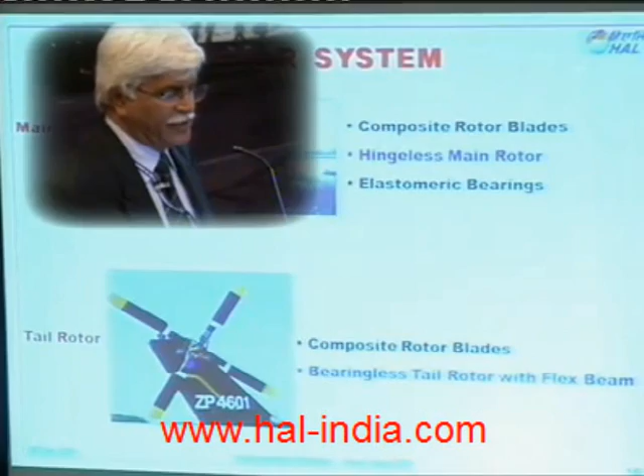The main rotor is composite. It's hingeless. It's the most agile helicopter in the world today because of this rotor system that we have on ALH and LCH. The tail rotor is also 4-bladed, and it's also composite, and it's a bearingless tail rotor. It doesn't have any of the mechanical bearings, etc., that are common in rotor systems, and this actually improves the reliability of the rotor.

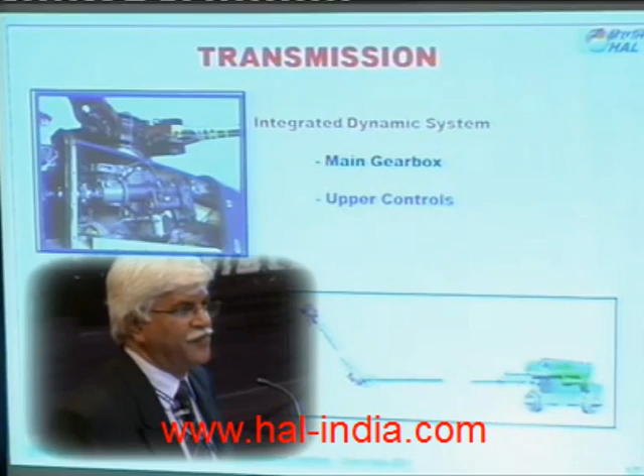The transmission is called an integrated dynamic system. It not only houses the gearbox, but it also houses the upper controls inside that. It is considered to provide some safety in terms of fire when you're under fire. And at the bottom you can see the intermediate gearbox and the tail gearbox. They are the same as on ALH.

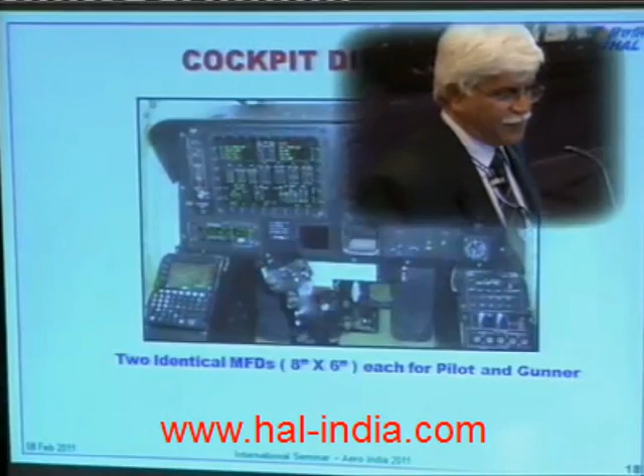This is what the cockpit is going to look like. It has MFDs, it has standby instruments, and whatever. It's very modern, it's state of the art. The airframe, this is what the airframe is. This is the kind of airframe which you would put in the breakaway fuselage test. You would load this airframe and you will check for its structural integrity.

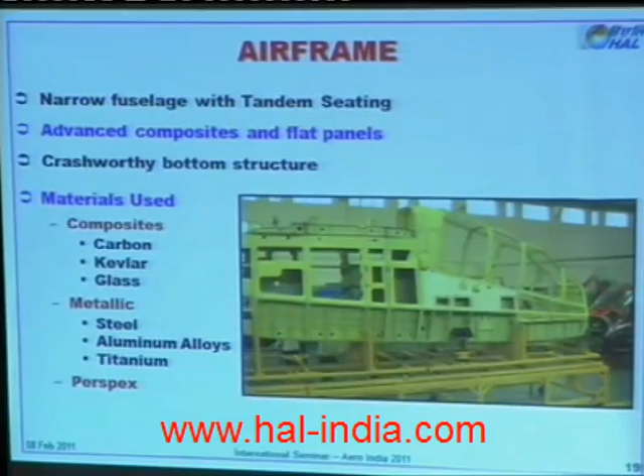The LCH, like the ALH, is very composite intensive. We use carbon, Kevlar, and glass. We also use metallic, especially for the frames. And these panels which we are using on LCH, unlike ALH, are actually metallic composite sandwich panels. The glass is Perspex.

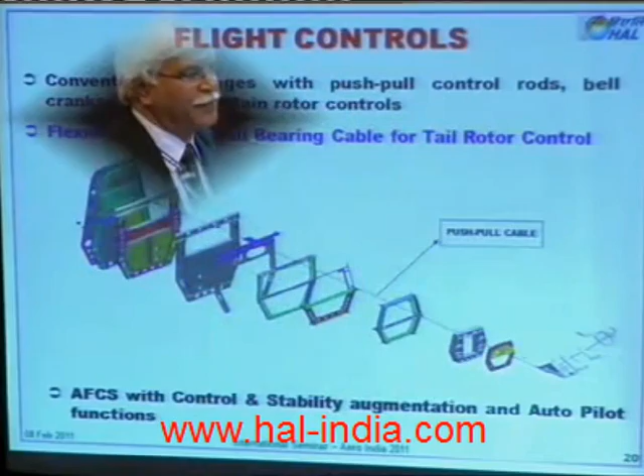In the design, we start normally with a feasibility study. We come up with some shape, we put it into the wind tunnel, and we do a lot of testing at the wind tunnel to ensure that the drag is minimum. We carry out weight, CG, etc., because unlike aircraft, helicopters have a weight problem, and your payloads can be greatly affected if your weight is high.

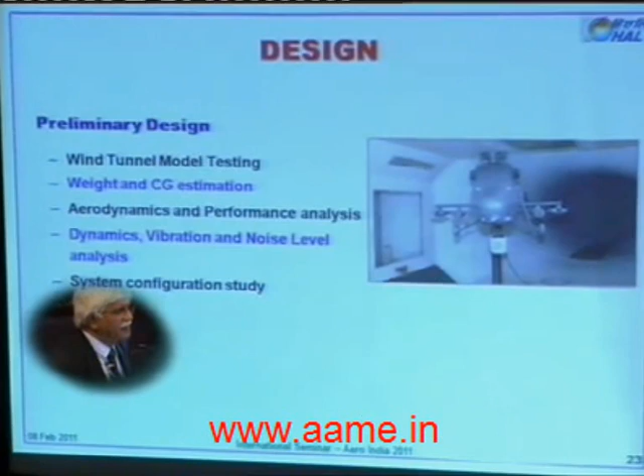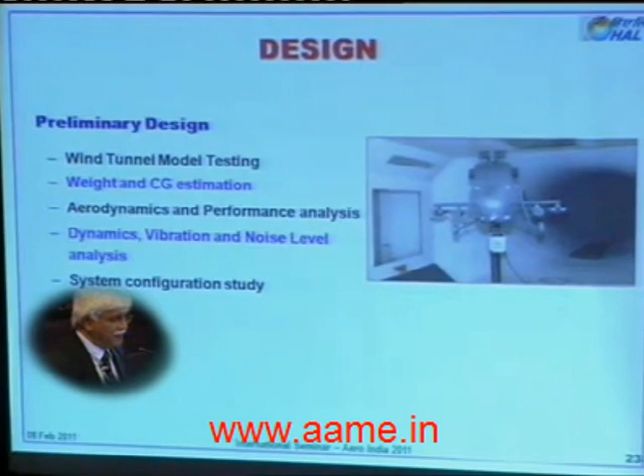We did have this problem on the LCH when we started, and we have had to reduce from the initial estimates something like 350 kgs, which we have done fairly successfully. Aerodynamic analysis, vibration, we actually use finite element models to study the stress as well as the dynamics.

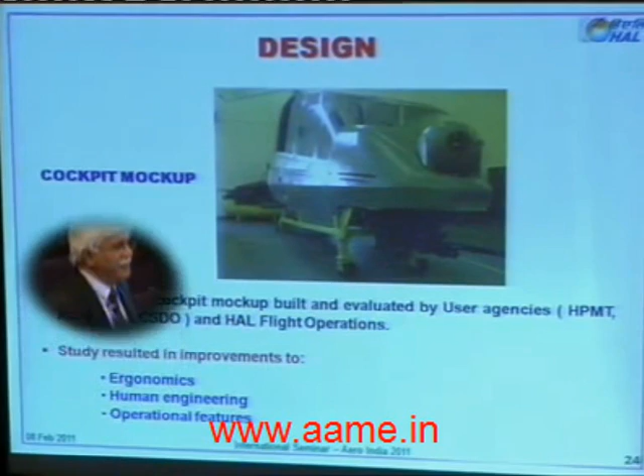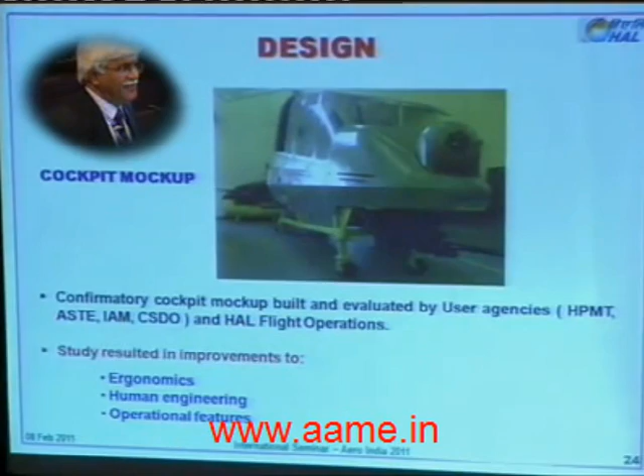We build cockpits so that the pilots, the test engineers, the maintenance agencies can look at these cockpits, and they will give us feedback on the ergonomics as well as the maintainability of this aircraft. This has been done. LCH is a very compact helicopter. We've had to push in a whole lot of things, so space is at a premium, but we have tried to manage this maintainability in spite of all of that.

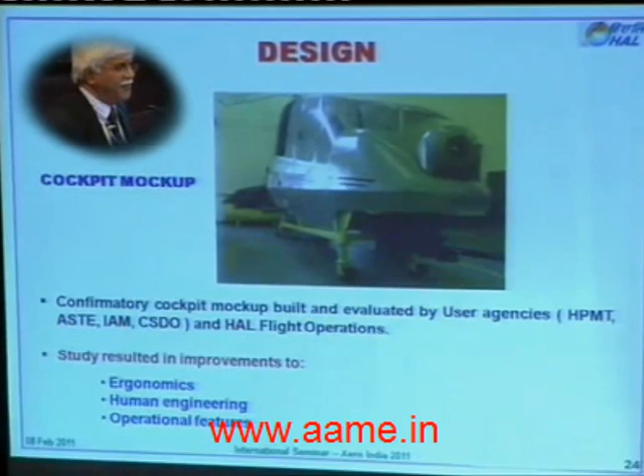This is just a detailed design. We have to study the structure. We have to study the systems that go on, where the systems should be put, what are the kind of installation problems. We have to study whether there are interferences and all that, and then we actually release the drawings and start the prototype assembly.

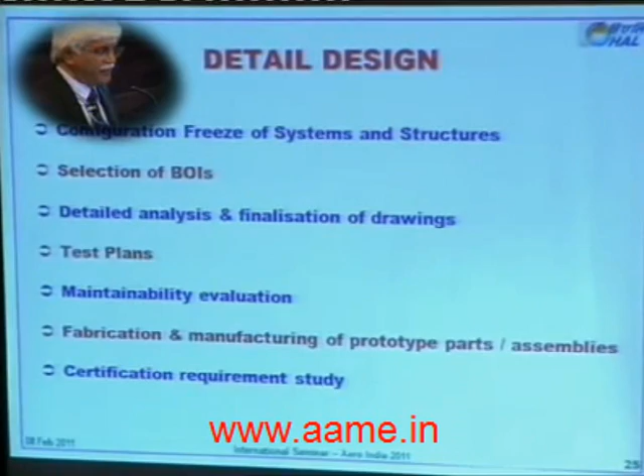The design tools, of course, are the ambience that you need. At HAL now we are very clear that unless you provide the right kind of tools to the engineers, you may not get quality work. So we have a very sophisticated design center, a whole lot of computing facilities and computing tools. We use finite element models.

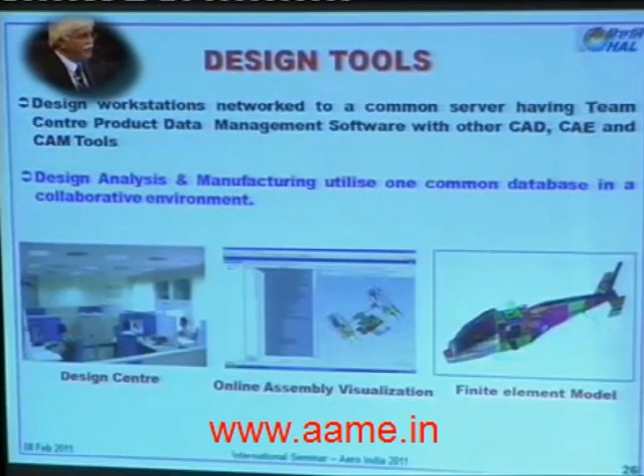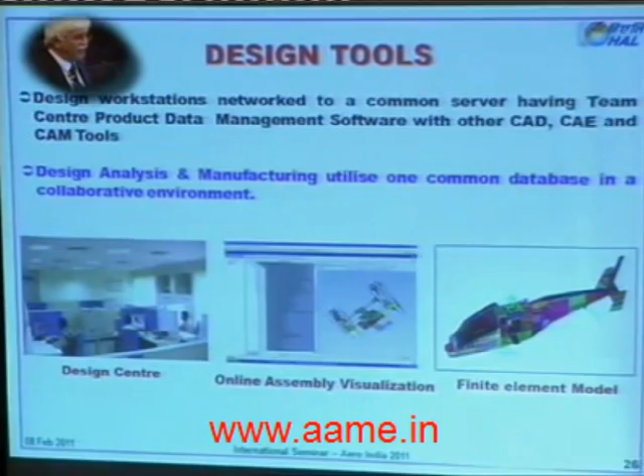There's Teamcenter, which has product data management software, based on which we can actually keep track of all the drawings, all the SOPs, standard operating procedures. We can track changes, all that which is important to ensure that when you finally certify, you have all information with you. This is what you can do with Teamcenter. You can actually design each component in 3D and then fit them all together to build it right there in your computer.

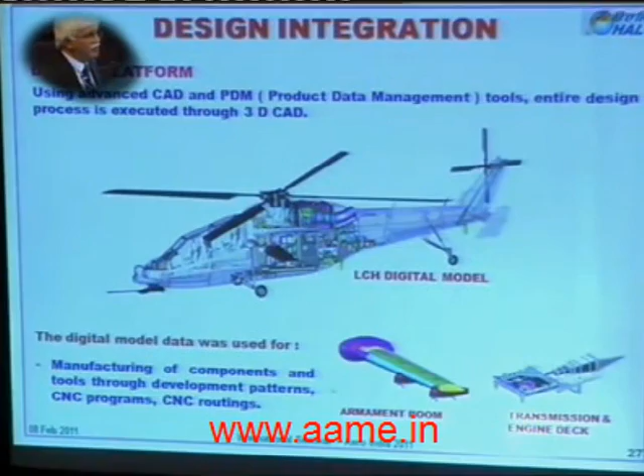When we do this design, we are also looking at the tooling, and even before the drawings are released, we would have already started building the jigs. And that's really what saves time. Okay.

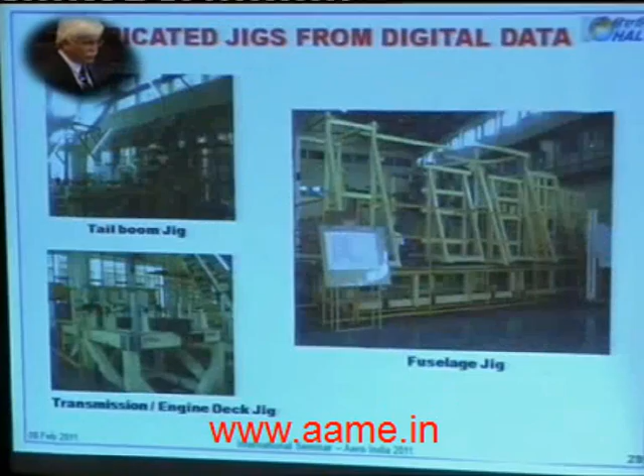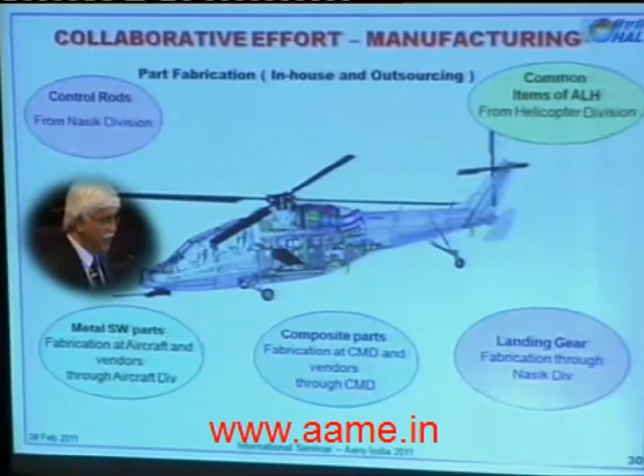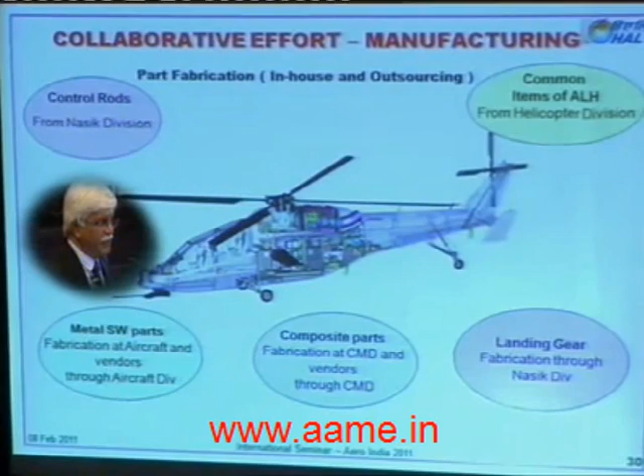This is the kind of collaborative efforts we have used. For instance, a lot of these important control rods have come from our Nasik division. We have sheet metal parts which are done within Bangalore. We have identified and developed many vendors, and we also have our aircraft division where it can be done. Landing gear was fully designed at HAL, and it was fully built by Nasik division of HAL. The composites, of course, we have a very sophisticated composite division where many of the critical composite parts are made. Many others are outsourced.

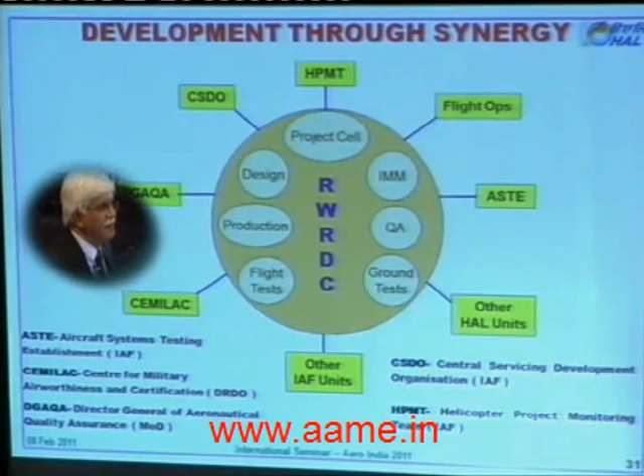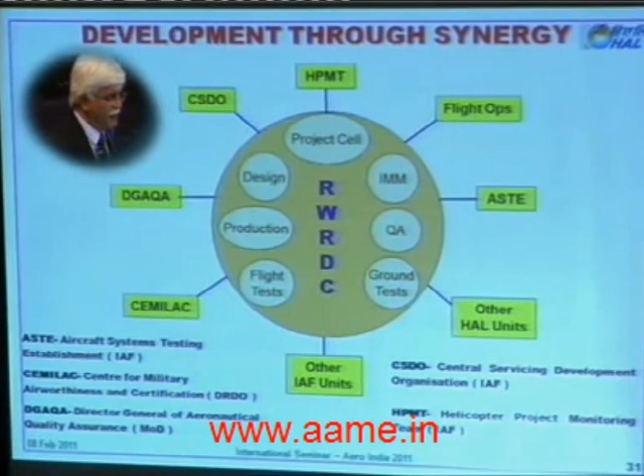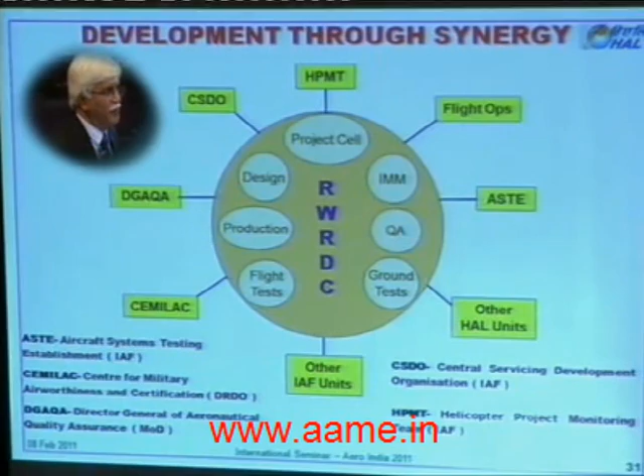No design can be done by an individual, and this is not just individuals together in an organization, but there is a whole lot of organizations which have to come together to make a product. And especially in aircraft industry, this is a must. So you can see that we've got Air Force, we have got CEMILAC, we have got DGAQA, we have got our own flight test center, ASTE, and other HAL units. And of course, we have various other people who actually make systems for us. This is again a repetition of how a prototype gets made.

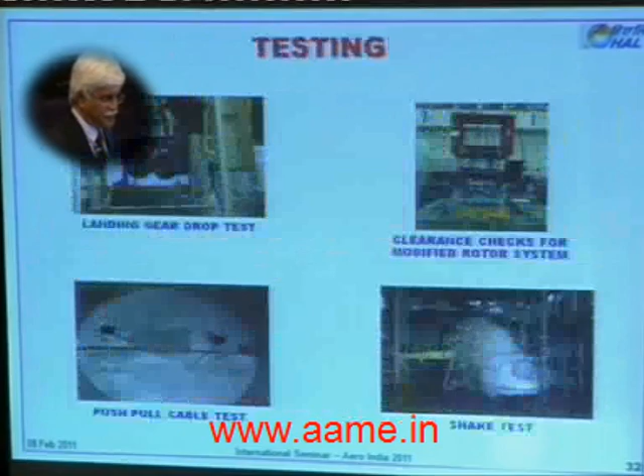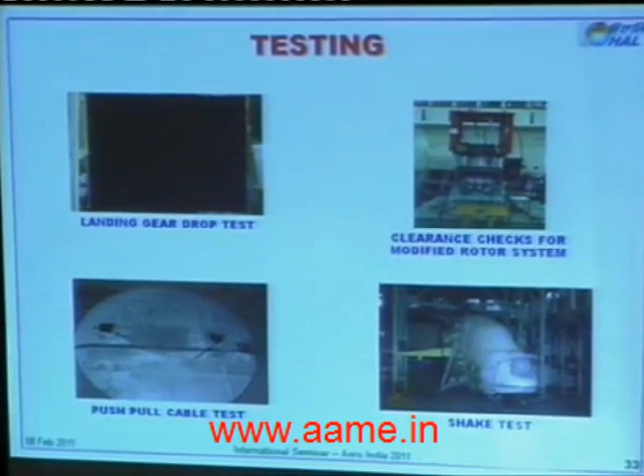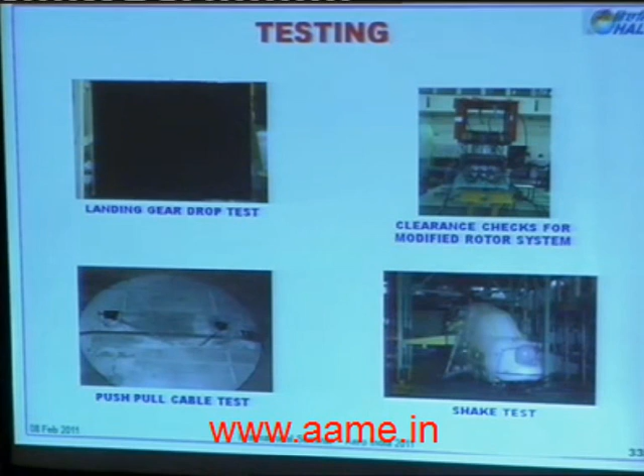Okay, this is some of the kind of testing that we do. That's a landing gear drop test that will actually confirm that we have done the right crashworthy structure. We also have something called a shake test, where the aircraft is subjected to a certain amount of force at various frequencies, and you have to ensure that the response of the structure is nowhere close to the rotating frequencies of the blades. We also had done some push-pull cable tests so that you don't have surprises when you go into the aircraft.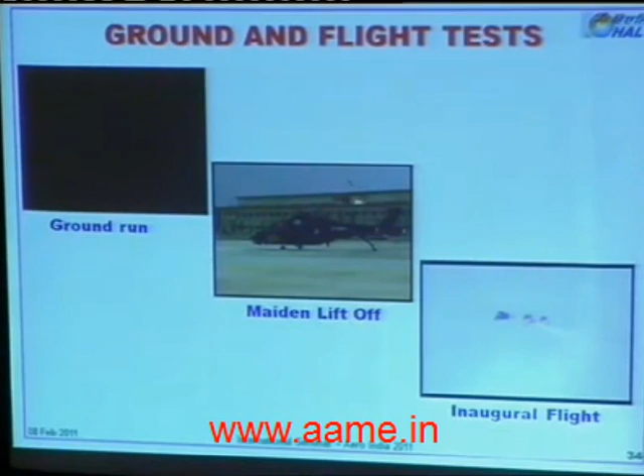So the aircraft was built. The aircraft is subjected to a whole lot of ground tests. We actually test the various systems, especially the dynamic systems. This was the inaugural flight of LCH.

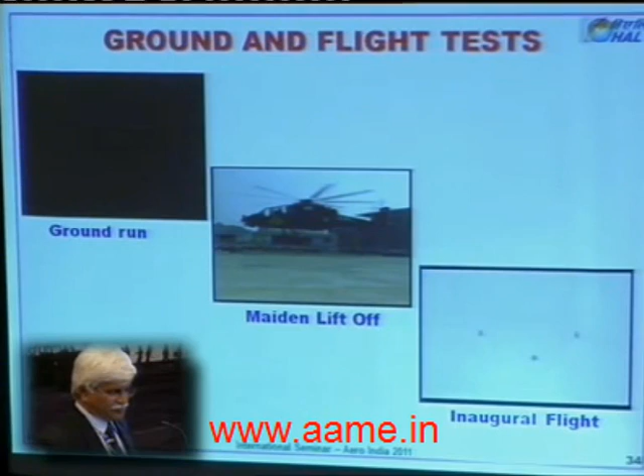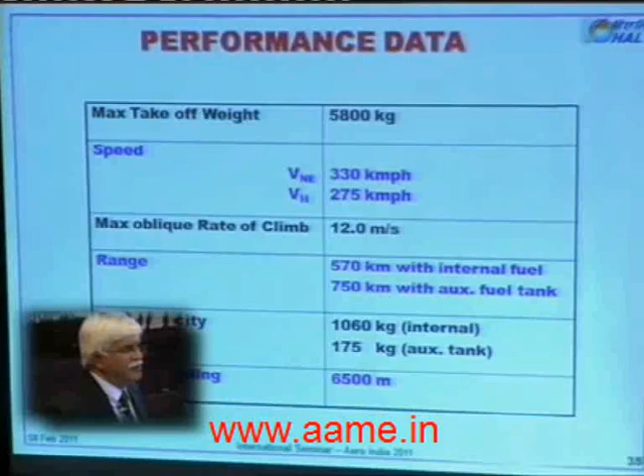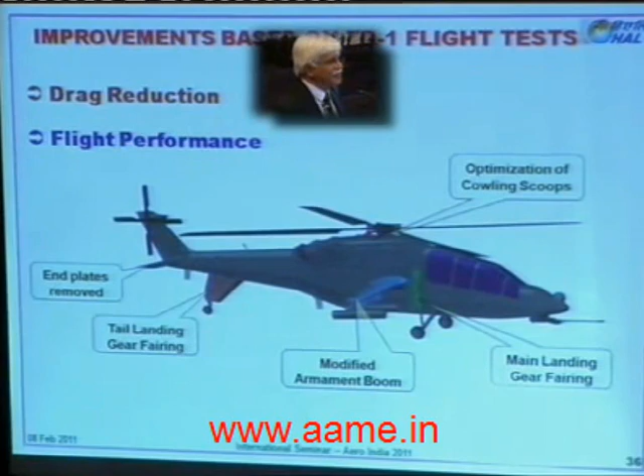Right. This is just a small table of the performance of the LCH. They are fairly good with respect to contemporary attack helicopters. This is what I was talking about. You don't build prototypes just to fly them and show them at air shows. They are very important sources of data for progressing the design to its final stage.

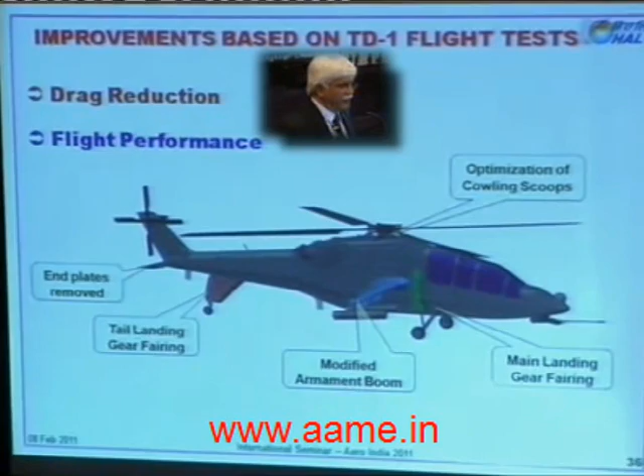One of the things that aerodynamicists will always talk about is the drag. And we also needed to improve the drag on the LCH. There are very many appendages that stick out on these aircraft, and we found through wind tunnel tests as well as through actual flight testing, we had a bit more drag than we wanted. And this has been corrected by means of two things.

We have put some fairing on the tail rotor, tail landing gear, and the armament boom which you will see at the air show will not be there in future. We have converted them into a wing, and this wing is under production, and as soon as it comes, we will start using them. The drag is also affected by some of the scoops that you put on, and on the LCH now, we have modified the scoops so that you have less protrusions on the aircraft.

There's a main landing gear fairing as well. The other thing that we did was, the aircraft has a certain attitude when it flies, and this attitude can be corrected by means of the horizontal stabilizer efficiency. We found that the end plates were providing a little more efficient horizontal stabilizer than necessary, so we removed it, and we found that the drag was reduced because of this, because the frontal area gets reduced.

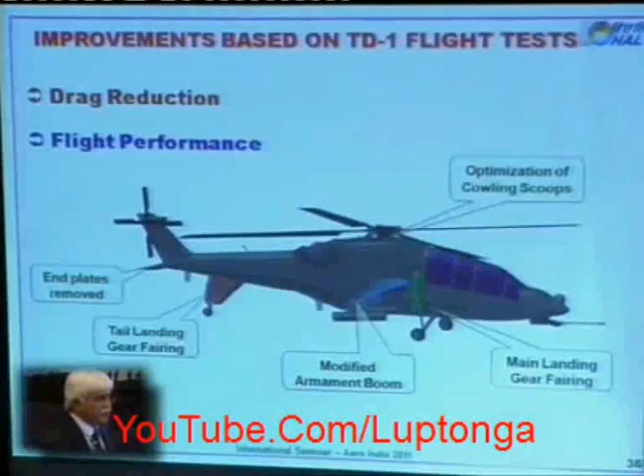Okay. Am I taking more time, or is it okay? Oh yes, I think another 5 minutes. Yeah, I'm all done, I think.

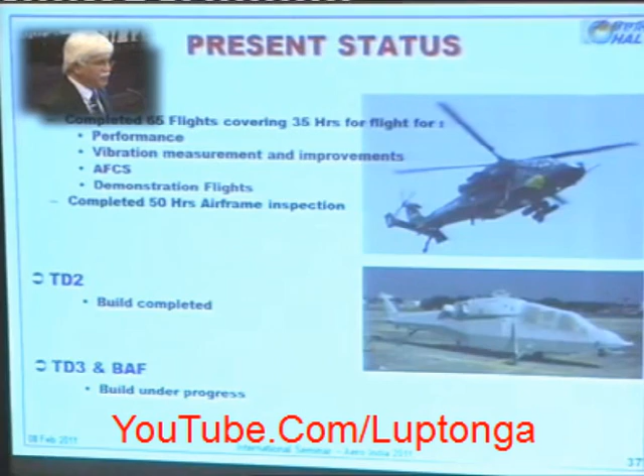This is where we are today. In the last 35 hours of flying, we have turned on the AFCS. And even without the AFCS, one of the beauties of LCH is that it's more stable than ALH. It's absolutely stable. The pilots were impressed with the handling of this aircraft. Nevertheless, we still have an AFCS on this, and this AFCS is the same as what we have on the ALH, because the rotor system is the same. We didn't find many surprises, except that during the roll, there has to be a certain retuning of the gains necessary because of the low roll inertia that LCH has when compared to ALH.

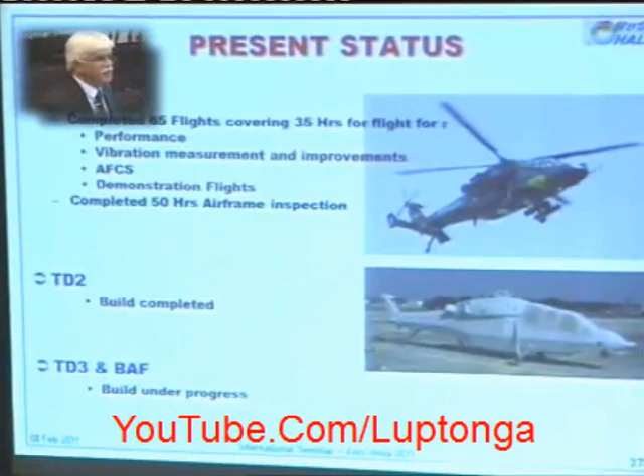TD2 is already built. You will see it. This is just a base paint. You will see some fancy painting on this aircraft. I would love for you to see this painting. This kind of painting is not done anywhere else in the world. TD3 will be available in February 2012, and of course sometime before that, we would be testing the BAF.

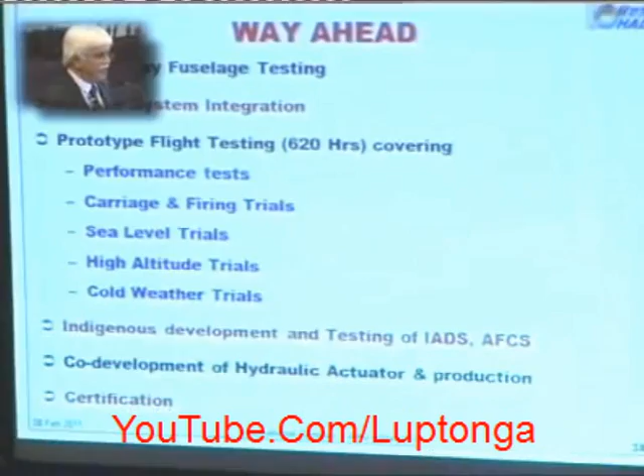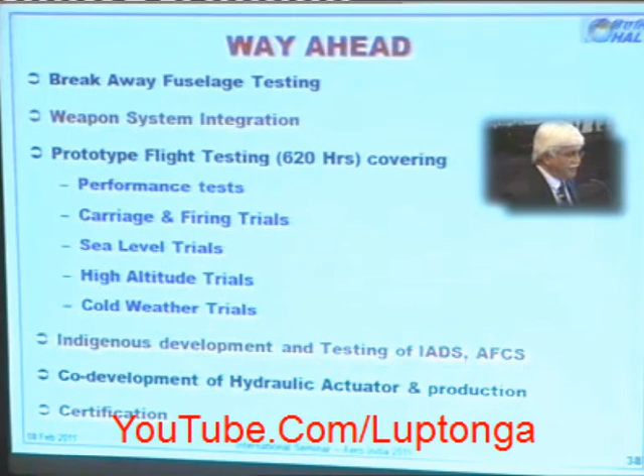What's in front of us as far as LCH is concerned? Now, after getting the aerodynamics and the vibration right, we will go into the weapon system integration, and all of what is written there will be done. It needs to be flown at high altitude, takeoff, landing, etc., and the kind of weapons that it can carry has to be established. And we have to do cold weather as well. High altitude doesn't necessarily mean cold. In the areas where we fly, it's hot and high. It has unique difficulties in making helicopters fly in that environment.

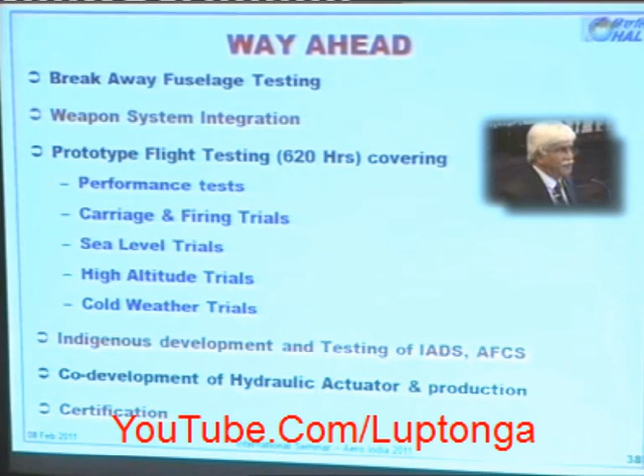We also have taken up an indigenous development of the IADS, or the Integrated Architecture and Display System, and the AFCS at HAL itself. We have a division called MCSRDC, which will take up this development. We also have started a co-development of hydraulic actuators, and they will be designed and then produced at HAL Lucknow. After that, we will be on the way to certifying this LCH.

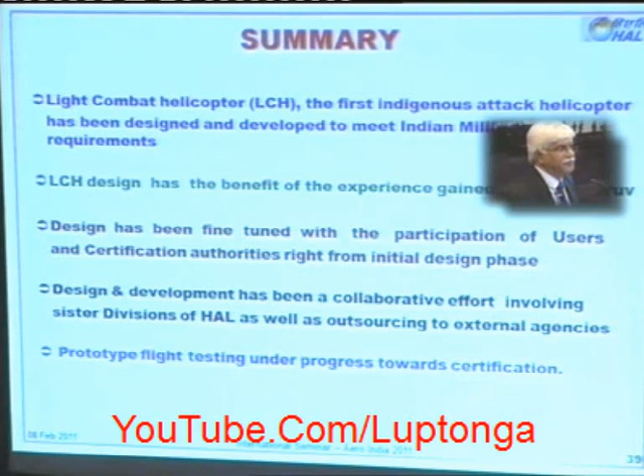In summary, it's a totally indigenous aircraft. We've not really consulted anybody on this one like we did on the ALH. Everything is ours except the systems, because we don't have all the systems with us. But otherwise, the structure and everything is indigenous. And all this we could do because of the ALH experience. Of course, as already indicated, the design and development was a collaborative effort between the various industries and the airworthiness authorities, the CEMILAC, as well as the DGA QA, and of course the users.